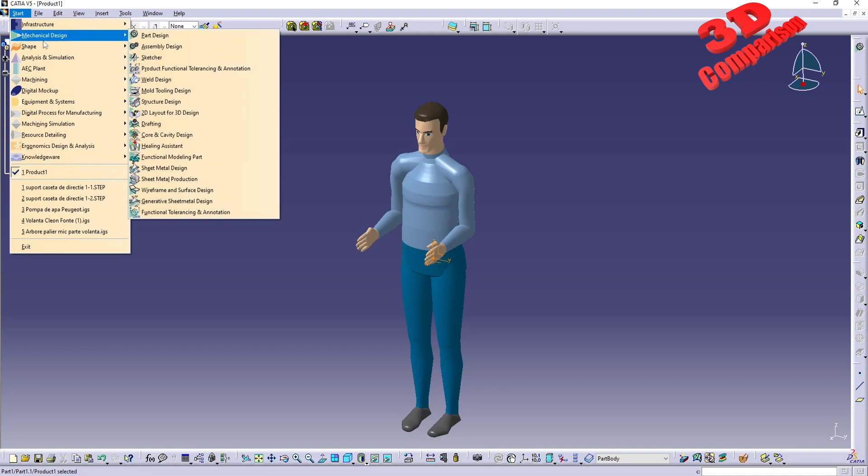So we are going to create initially a spherical model. To do that, I will go insert new part, and double click on part 1. This will take me to part design. If for some reason you are not within part design after you double click, you can just go start, mechanical design, part design, and this should take you there.

Now I will highlight the plane over here, so the X and Y should be fine. I will create a new sketch, and I will create a circle. A radius, I will add this to be 30. And since I want to define a sphere, I will also create an axis.

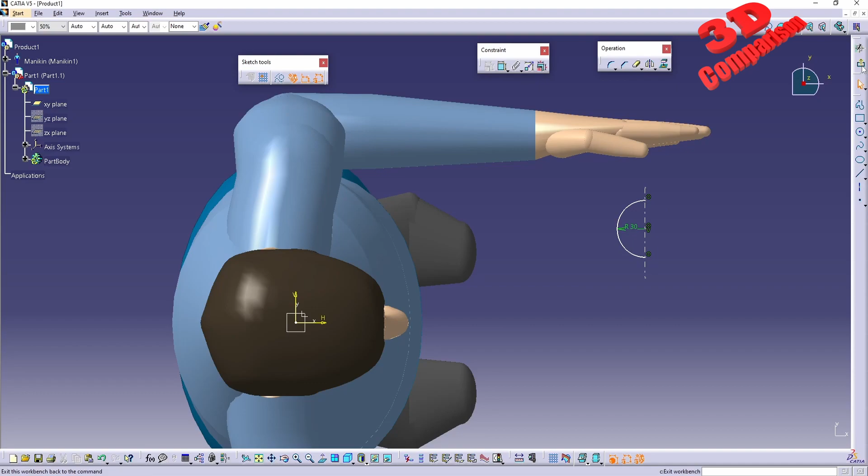I can put that axis to be coincident with the circle center. Afterwards, using the trim tool, I will delete half of that. And with the resulting sketch, I will create the following model over here.

Now I will move this to be a little bit closer to the hand of the manikin, so I will double click on product 1. This should take me into the human workbench.

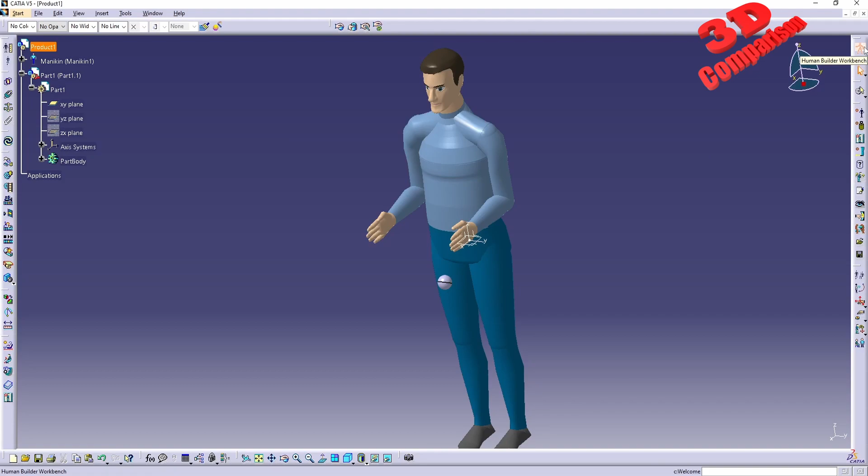I will enable this to snap automatically to selected objects, and I will select the part 1. We're gonna see that the compass will snap to the origin, but that shouldn't be any problem because we can still manipulate the object.

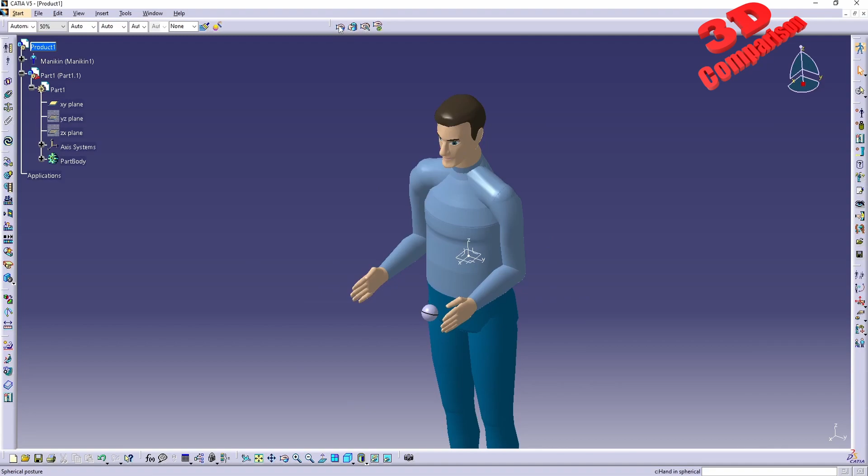Okay, so let's see how we can use the hand spherical posture. Before we're gonna use that, I should also position the mannequin within the reach. We can do that over here. We have a reach position only, and we're gonna have reach position and orientation.

But before I activate that, I will go within inverse kinematic behaviors. For the case study manikin, I want this to have a spine and lumbar support over here. So let's just see the difference really fast.

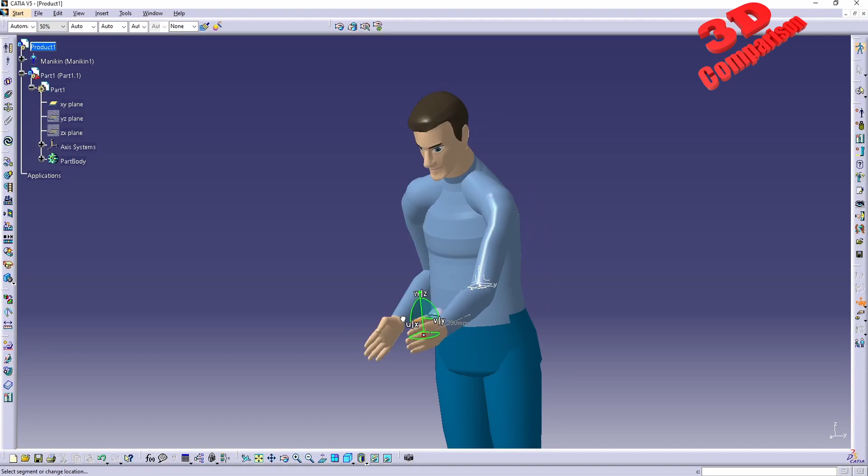So if I will go with inverse kinematic with this hand, I want to grab that. We're gonna see that now the character will move like this. So we see the reach. If I will move all the way to the side, we're gonna see that the torso of the character will not move. So I will undo that.

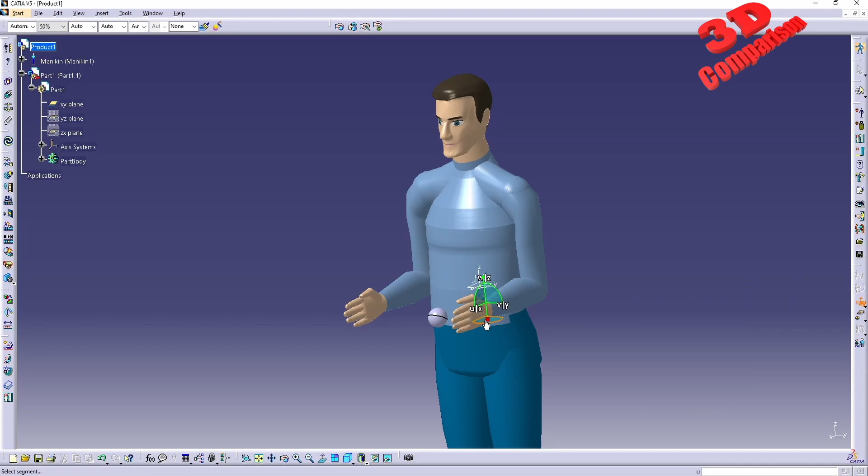I will go to inverse kinematics, and I also had thoracic enabled, because by default, if you don't have that, the character will move the hand like this. As you can see, just the hand from the shoulder is moving up and down according to the desired location, but the torso is not moving.

So I will undo that, and I will enable for the character thoracic and lumbar spine. I will also check balance pelvic motion, and I will also want the character to look at the object that will grab, in this case that sphere. So look at active, and this should be the changes to the inverse kinematic behavior.

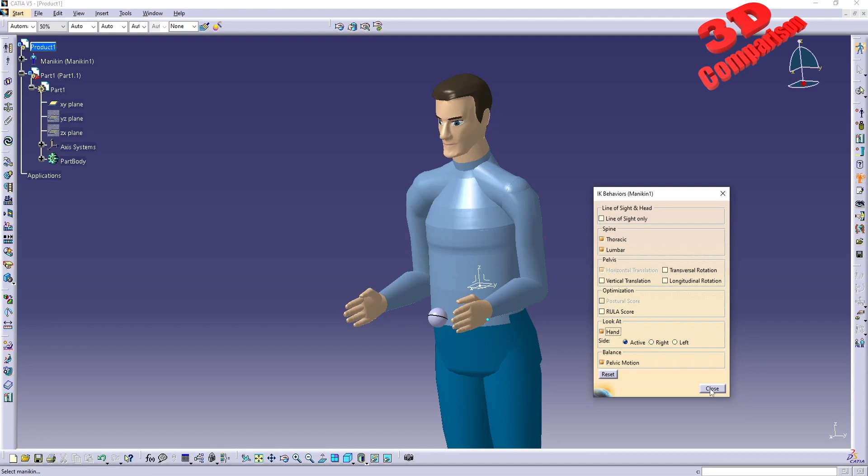And afterwards, let's do that positioning. So I will click over here on reach position only. Now on the surface of the object, I can select the location. So for example, I want over there.

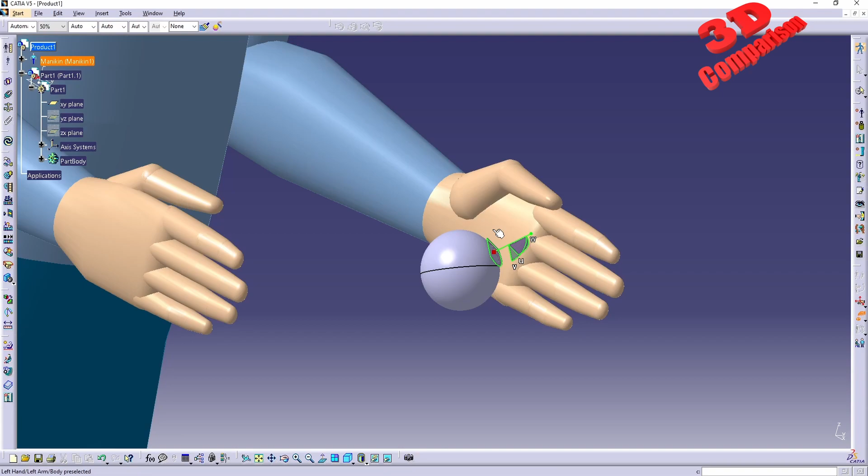And now I will need to select the hand. So I will select the surface from the palm interior, and we're gonna see how that moved into position.

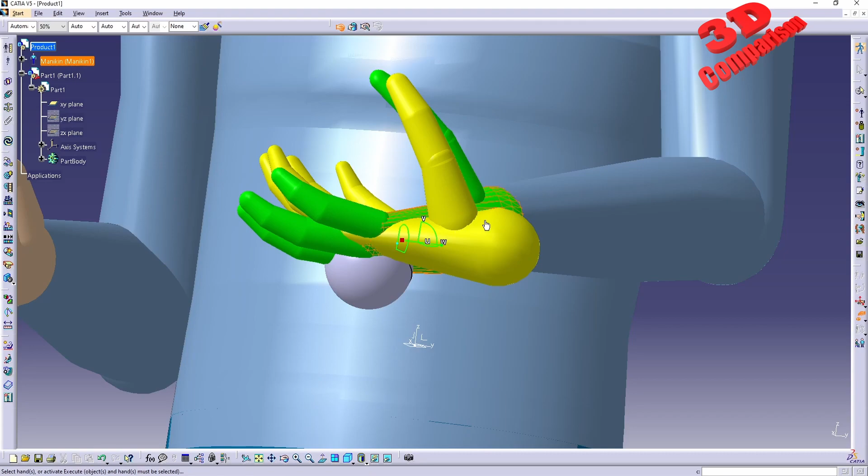And now I will also add this to the hand spherical grip. As we can see over here, the hand will be positioned like this, so it will be with green. Now we're gonna have the twin, which is the yellow one, which will also indicate the out of reach section.

But you can just manipulate this. So for example, maybe I want to position this underneath that sphere. If I want to also close the fingers, I can do that.

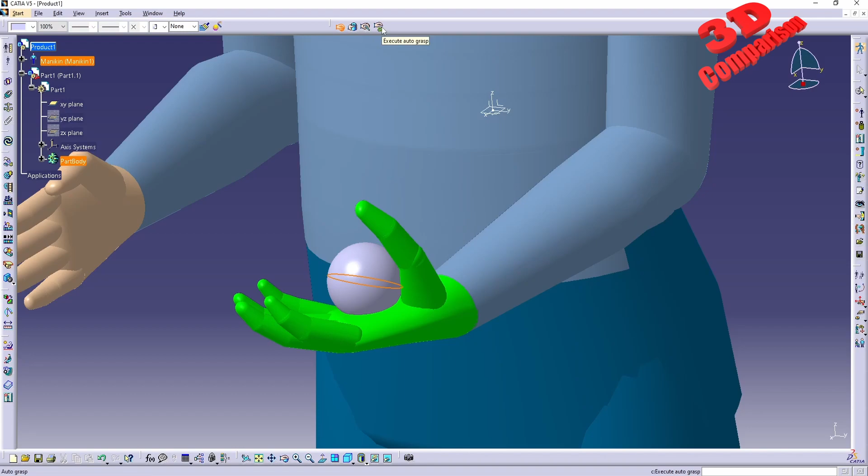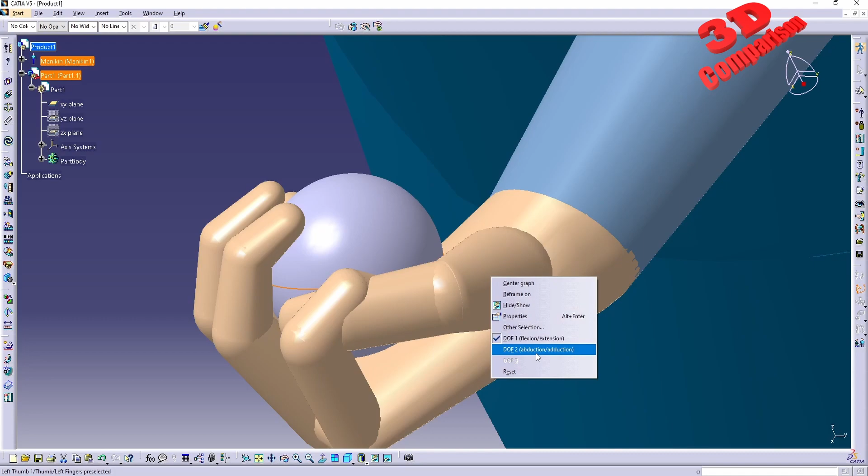I can also go over here and execute auto grasp, and the software will try to find the ideal position. We see that in this case, we have two fingers overlapped. We can just change those. So for forward kinematics for this finger, I will right click, and for the other one I will change the abduction and adduction so they won't overlap. Also for this finger, I see that this rotation is quite snappy, so I will just move it like this.

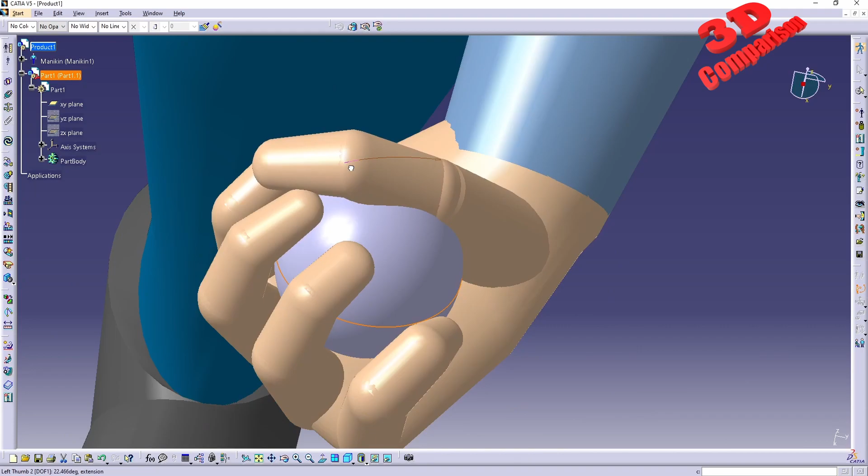Okay, so we're going to see that the mannequin will grasp that, with the execute auto grasp for the spherical shape over there.

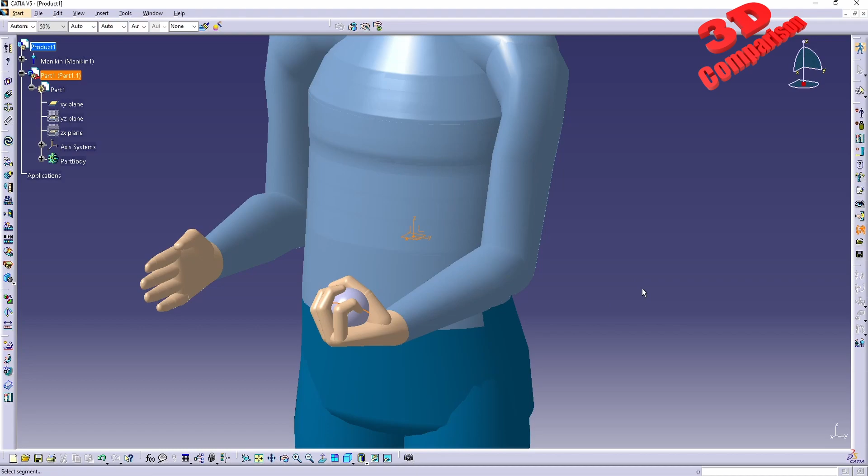Now, if we want to attach this to the mannequin, we can do that using the attach-detach button. So I will select, we see over here we are indicated to select the segment. So it will be that one. And we're going to see that part 1, which is the name of the new part, will be attached to the segment left hand. And I can click OK.

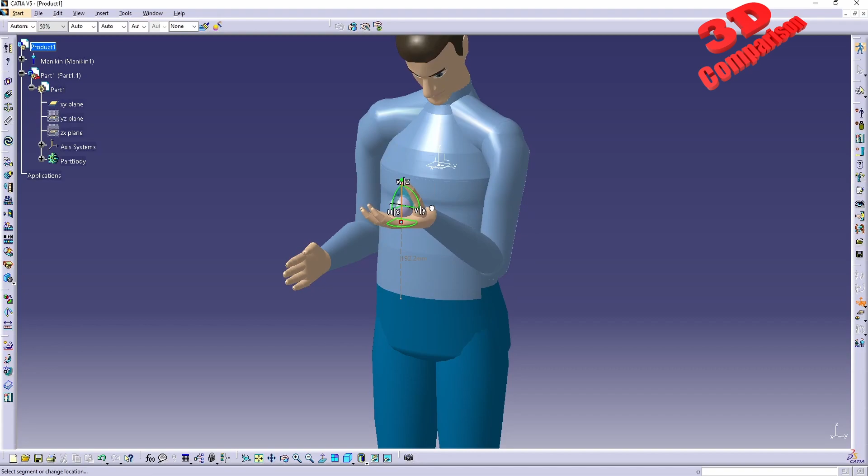And now if I start the inverse kinematic forward, we're going to see how that character will move the hand. We're going to see that in this case, the grasp is no longer there, but we can always compute that grasp. Let's see.

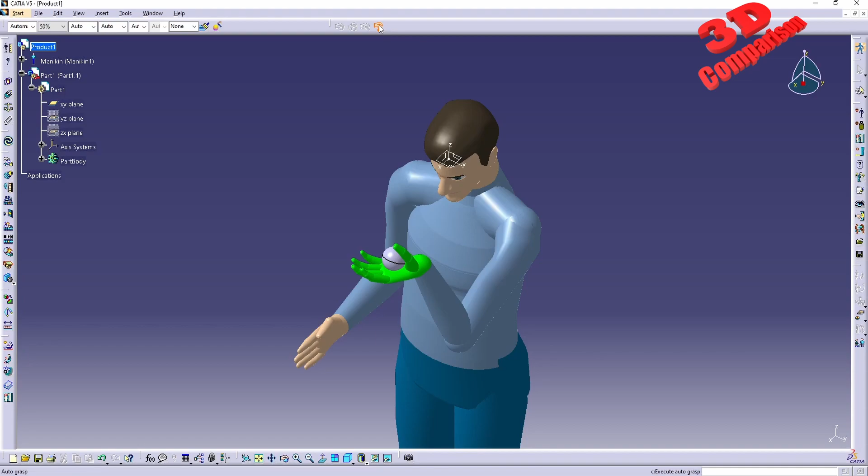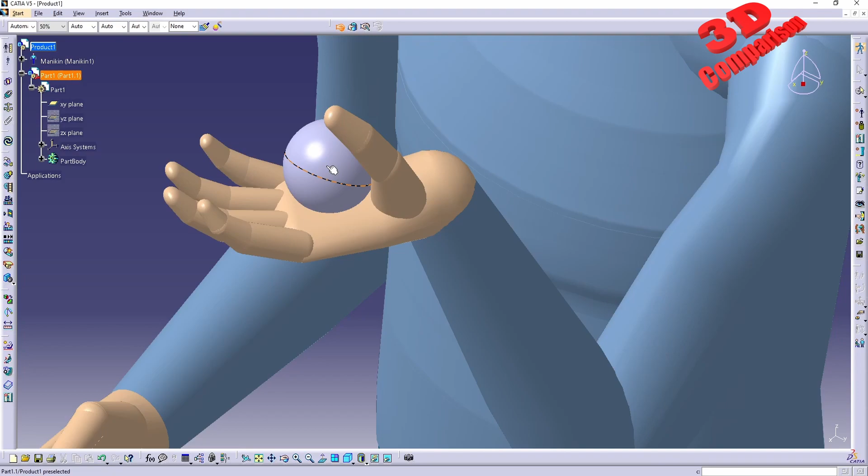Okay, if I disable that and choose again hand spherical posture and select the hand, I see that for some reason it doesn't want to grasp that anymore. So let's retry that. So within the product, spherical pose for that part with this hand.

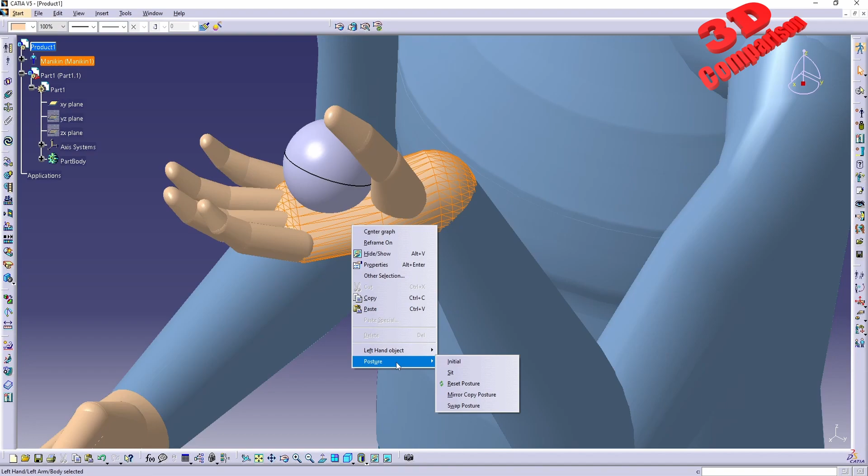Okay, I will just move the hand, or we can also use another technique. If I right click over here, we're going to see the posture, but I will go within the posture editor. And you're going to see we have the hand over here.

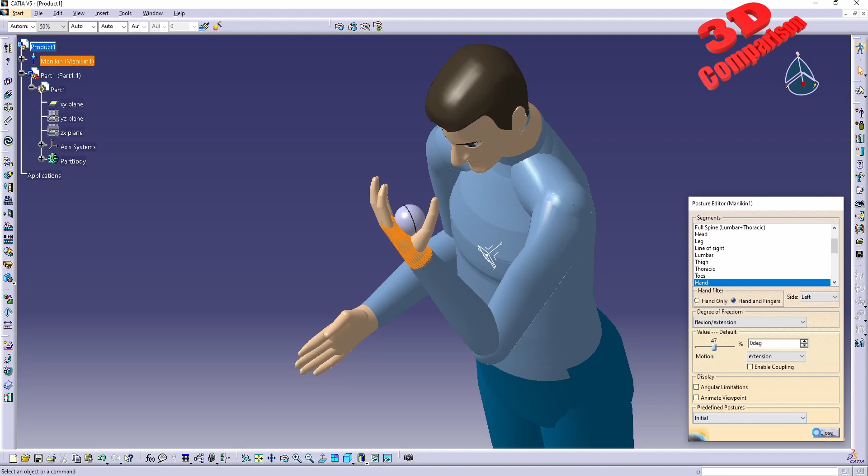So we have the side. I will just reset this. Let's see if the grasping will work now. So it still doesn't want to compute that grasp. Okay, so now again we have that grasp done.

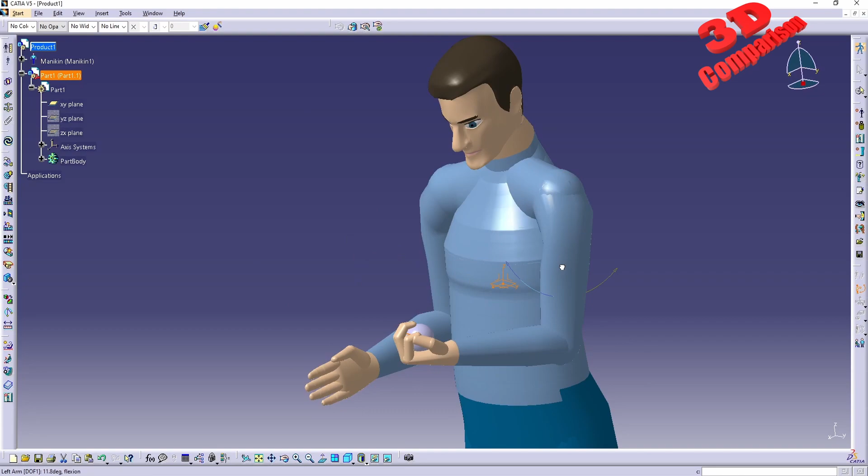Let's see if I use the forward kinematics now. We're going to see that the forward kinematic button will not unlock that grasp. But if I go with inverse kinematic worker frame, or if I go with segment in this case, and let's take a look for the hand, we're going to see that the inverse kinematic models, both the inverse kinematic worker frame mode and the segment frame mode, will close that grasp.

So keep that in mind, that you should go with forward kinematics, as that will also keep the position of the hand.

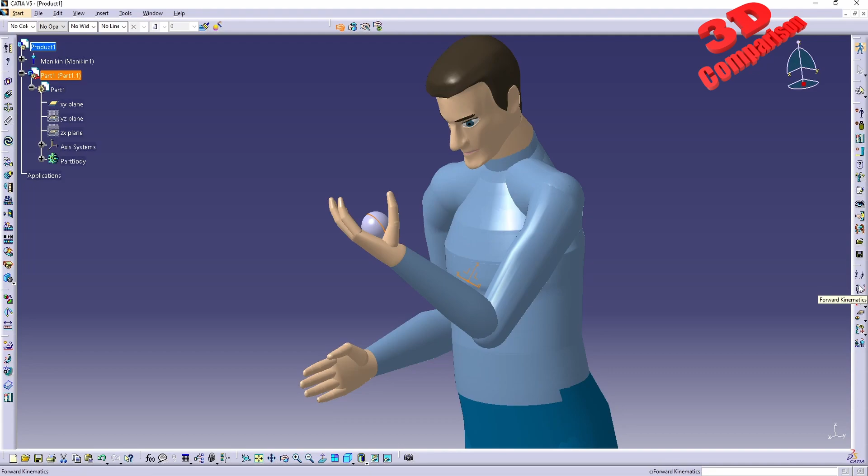Now let's see, for the other grasp, this will be a cylindrical one. I will create a new part. So I'll go over here, create. I want a new part, this should be part 2. I don't want to specify a new origin.

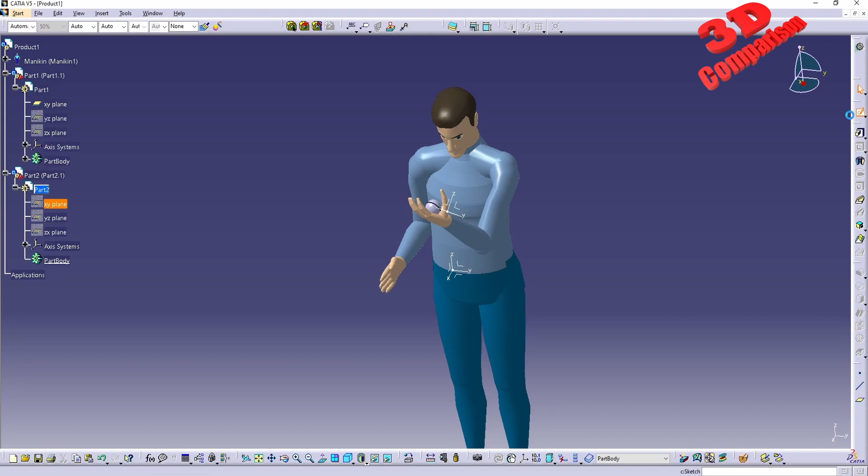And within the X and Y plane, I will double click on part 2 to go to part design. And over here, I will create again a circle. I will add a radius of, for example, 40. And now I will extrude this.

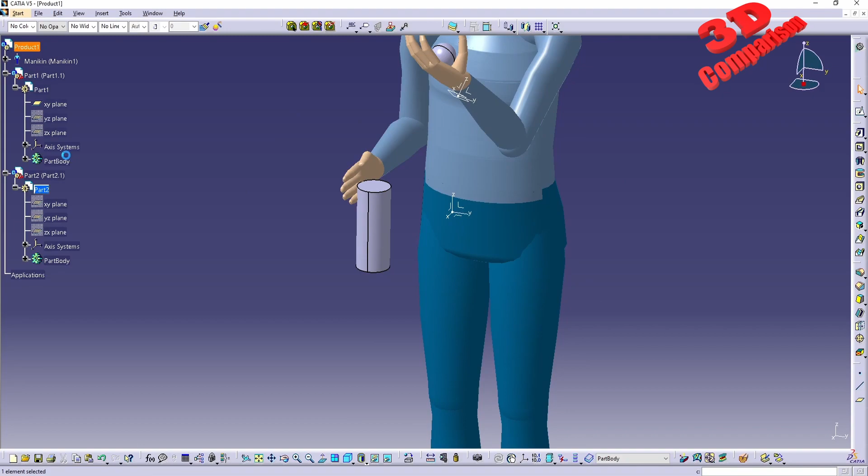For 20 millimeters, 200 millimeters. Okay, so in order to reposition that, this should be within the grasp of the mannequin, but I will just snap that and move it a little bit higher.

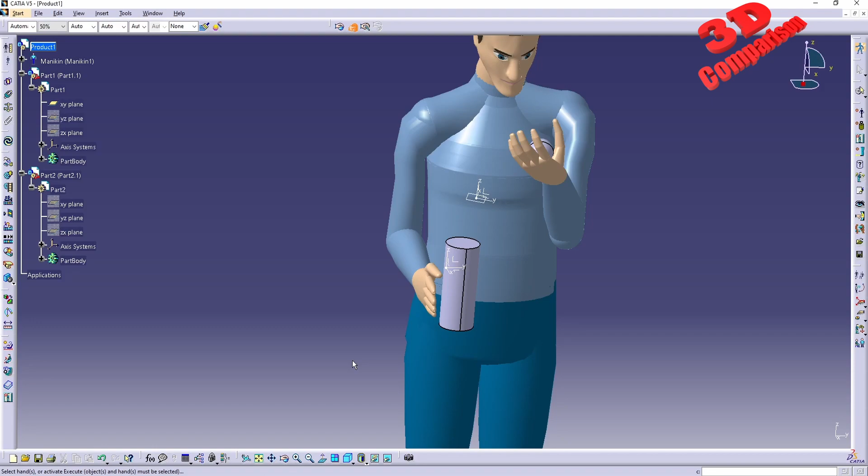Now, let's see how the cylindrical grasp posture will work. It will be the same as the sphere. We're going to select the tool. Afterwards we're going to select, we see over here on the left side of the screen, select hands or activate execute objects and hands must be selected. So I want this hand to go over there. And we're going to see how it went into that cylindrical shape.

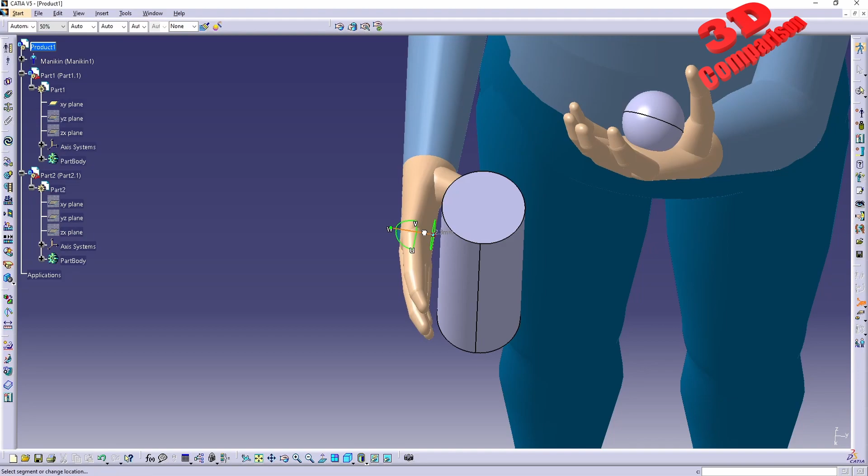Okay. Now we just need to adjust maybe a little bit from the inverse kinematics. I will slightly move the hand, so like that.

I can also always go within the top view because that will give me a better view. So top view should be that one. And over here I have the possibility to better fit this within the mannequin hand.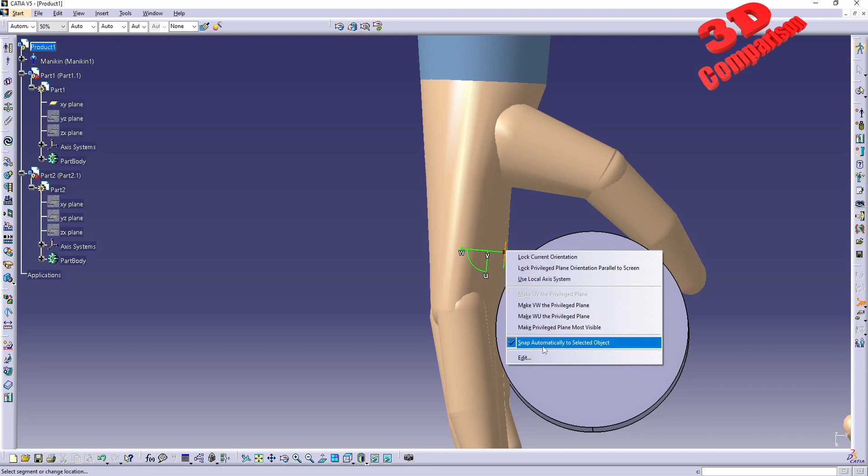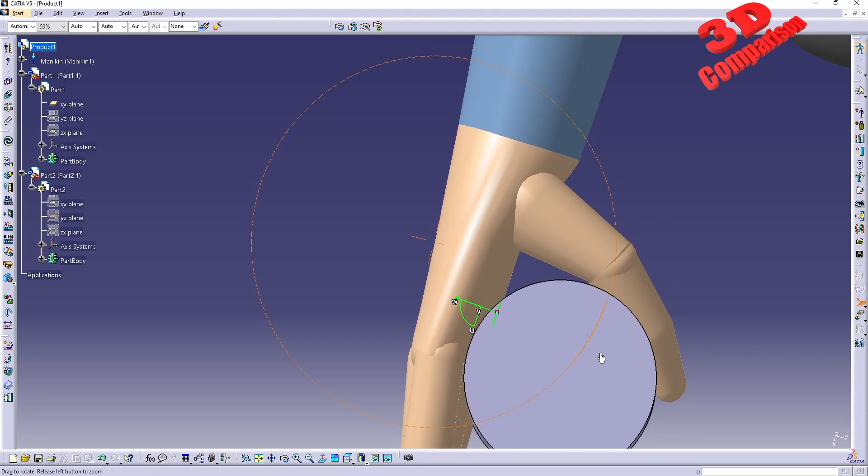We're gonna see that currently this snaps from 0 to 10. In order to change that, we can edit this, and we see over here the increments. If I add 1 for each, now if I move the compass, this will always go according to those increments, so it will only add 1 millimeter. This will be a lot better to position the mannequin hand.

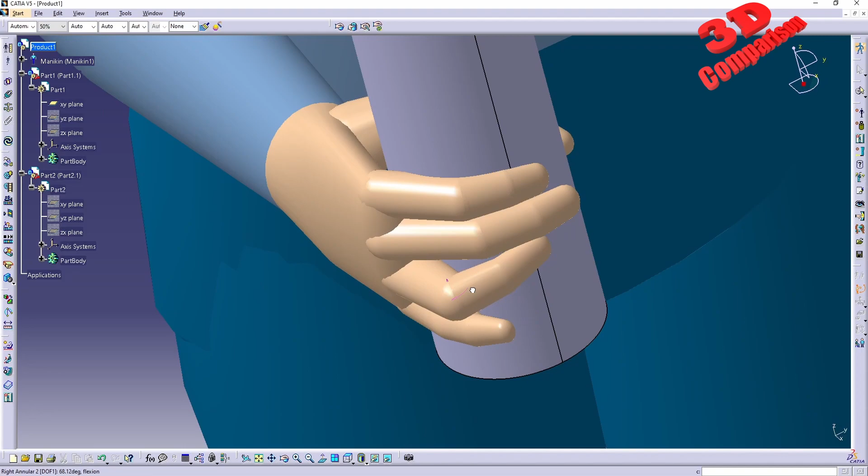We can later adjust the grasp of this. Using the inverse and forward kinematics over here, I'm gonna position the fingers of the mannequin to that cylinder. Keep in mind you'll have to do that. If you want to change, you can change the second degree of freedom. For example, for this one we only have 1 degree of freedom, but for this one we also have the radial deviation, which will allow me to go up and down with the finger.

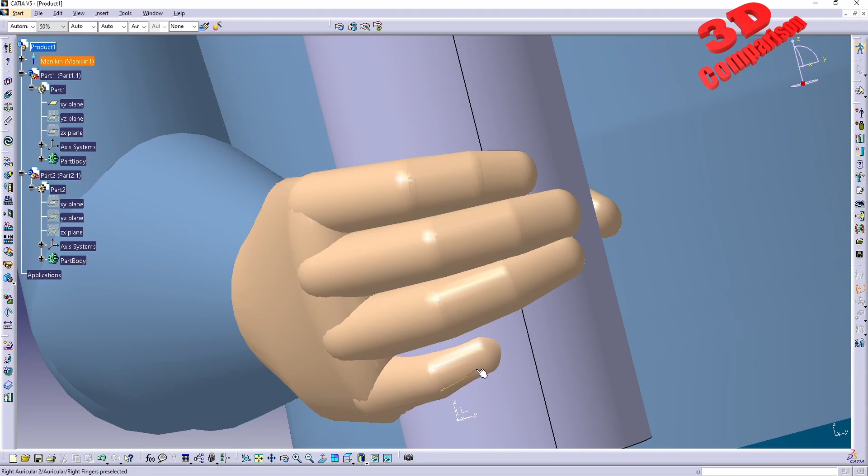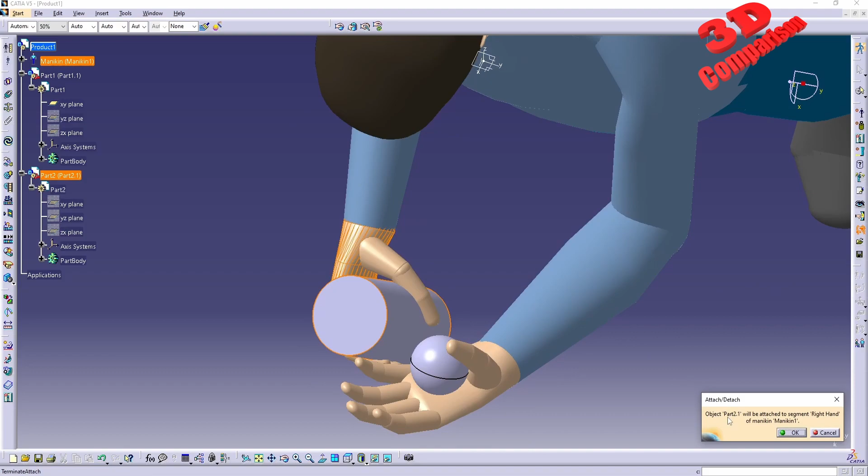Afterwards, I just want this to go a little bit back, so somewhere like this. And again, if you want to grab that, we can just select the detach. Afterwards, I'll select the object and attach this again to the hand. We're going to see that part 2 will be attached to the right hand. We can click OK, and we are going to have that.

Now if you want to detach one of the components, you can use the same function over here. So attach, detach - you select the object, and over here we can either detach it or attach it to another object. With a simple detach, this will be successfully detached, meaning if I move the hand, that won't move anymore.

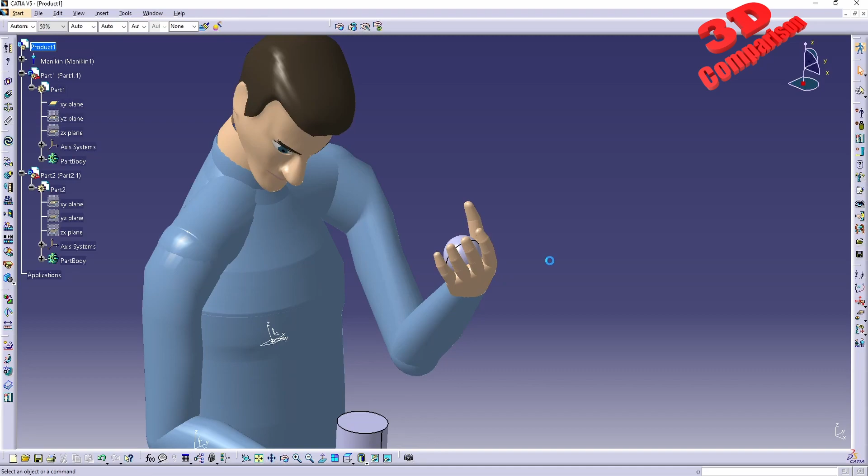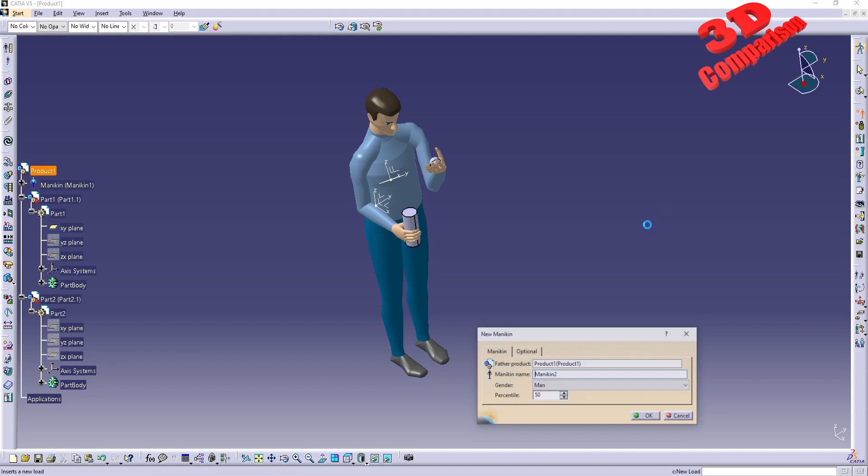But let's see also how we can attach it to a different one. So I will press undo multiple times until this is still connected, like this. And I will add a new mannequin over here. So go to product 1, insert new mannequin. Let's create a woman now. Go OK, and we're gonna have the second mannequin over here.

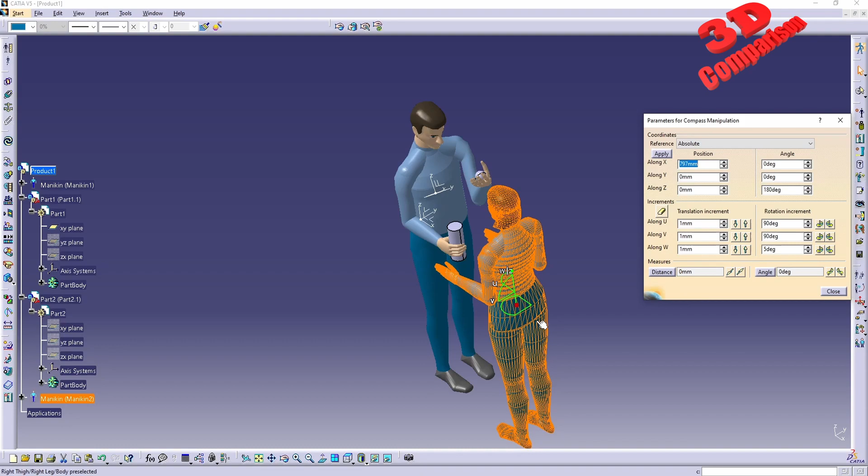I want to move this in front of that. As you can see over here, the increment for rotation is currently set to 5 because I have that over here on the W axis. You can right click on the compass and change that if you want smoother and finer rotations. I see that this changed, so I'm just gonna go over here 0 and apply.

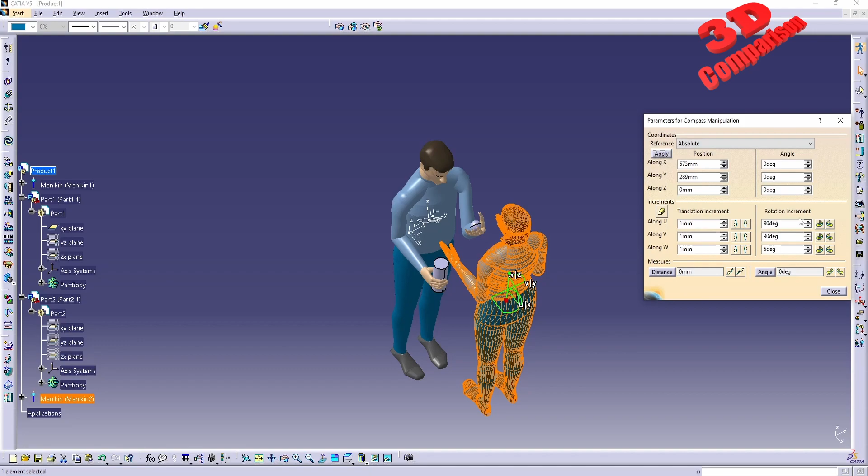You can also put directly the absolute values, either for the location or for the rotation, just like I did over here, in order to position your mannequins.

Now let's say that we want that sphere to be grabbed by the second mannequin over here. We can go with the reach position over here, or we can go with position orientation, but usually this will rotate the arm a little bit odd. So let's take a look at that.

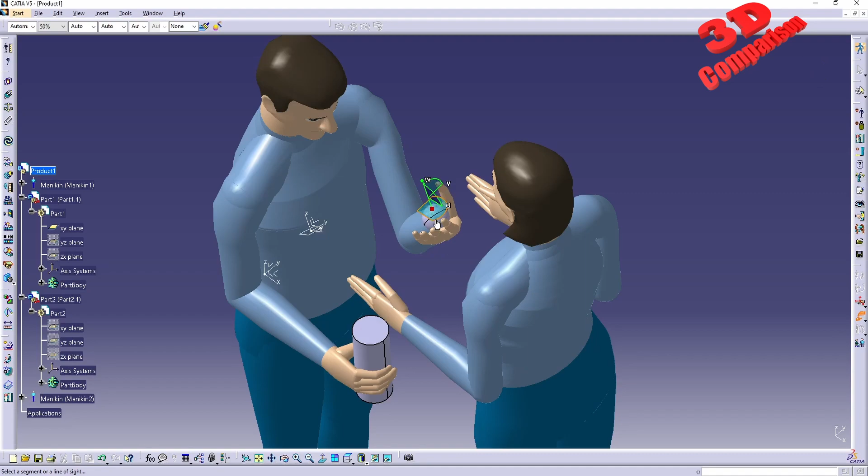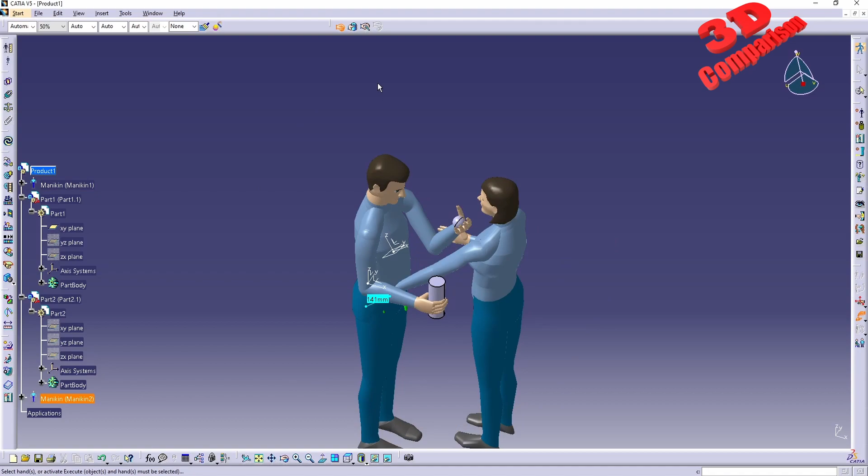I want to position the hand of the second mannequin over here at the top, and I want the palm at the top. We're gonna see how that will look. Over here we can now compute, in this case, a spherical posture. We can see that didn't go in the desired location.

So I will just move this manually over here, and we're gonna have those fingers. I will just slightly position - we're gonna have a lot of collisions over here.

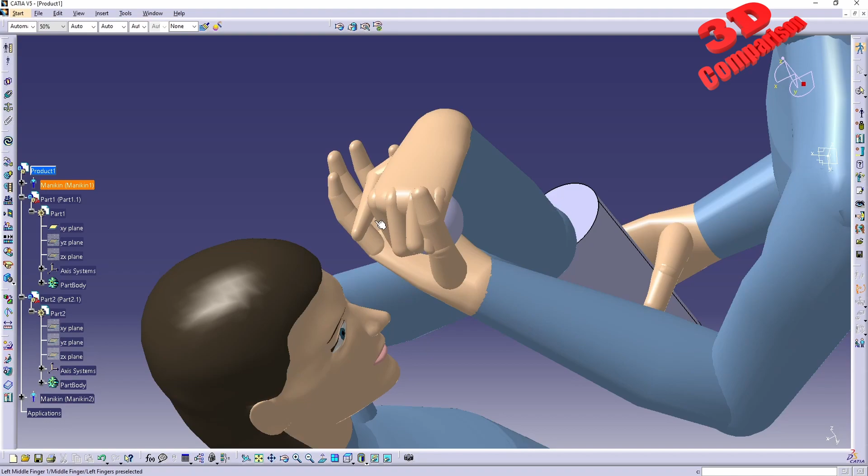This is why I also appreciate the fact that Dassault decided to implement this, because other CAD solutions don't want to deal with mannequins and posture like this, because it's not the simplest thing to do inverse kinematic simulations.

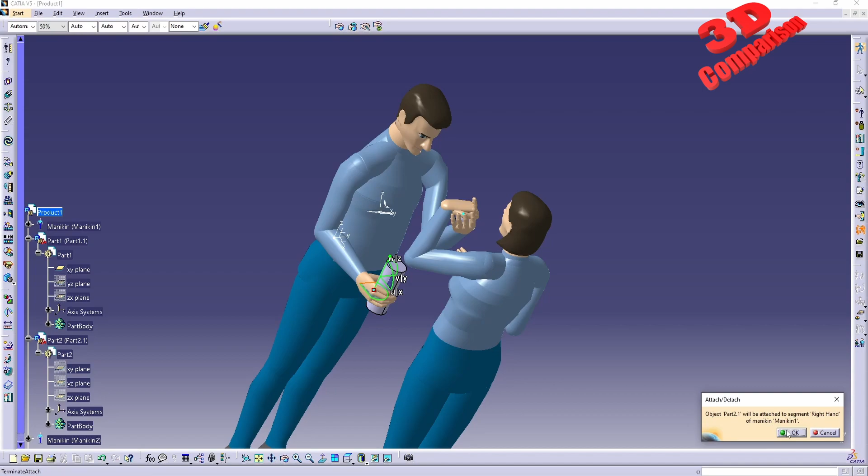Let's just move this hand. Okay, I see that that is no longer attached. So let me just attach that. I see that I also moved the hand a little bit too much. Attach to the hand, okay. And afterwards I will just move that.

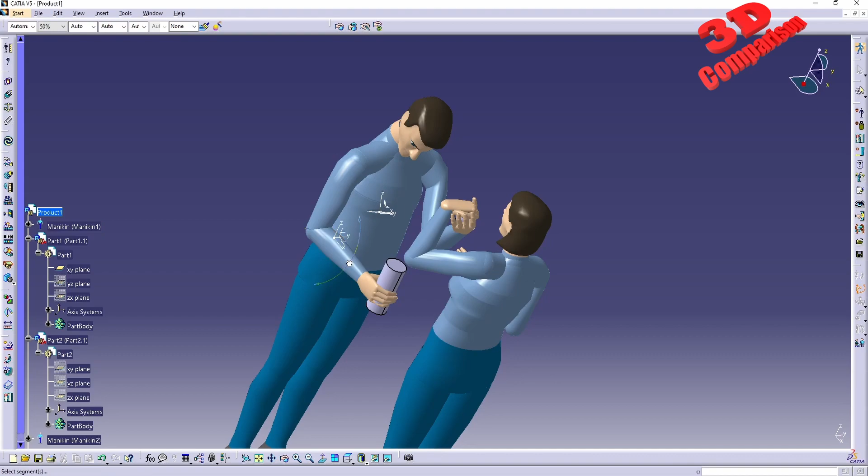Okay, I see that for some reason that didn't attach. Let's do it again. I want this to be attached to the hand. Click OK, and afterward let's just go with forward kinematics. Yeah, that should work, and I will move that cylinder over there.

Now I want to attach the sphere to the other mannequin. I'll go to define attach/detach. I want this one, and we see over here attached to other. I will select the female hand, so mannequin 2.

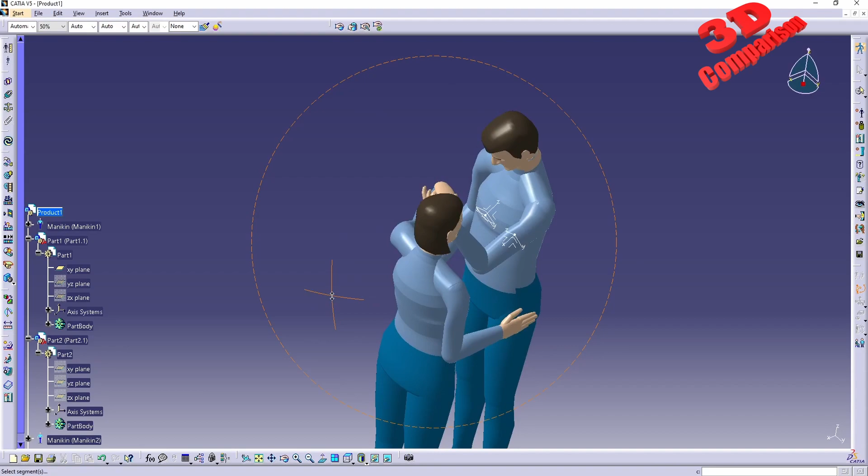And now if I move initially the hand of this one, that should be okay. So we had that moved. Keep in mind that for each section you're gonna have abduction and adduction, and you can slightly adjust that. Now I have the possibility to manipulate the other manikin.

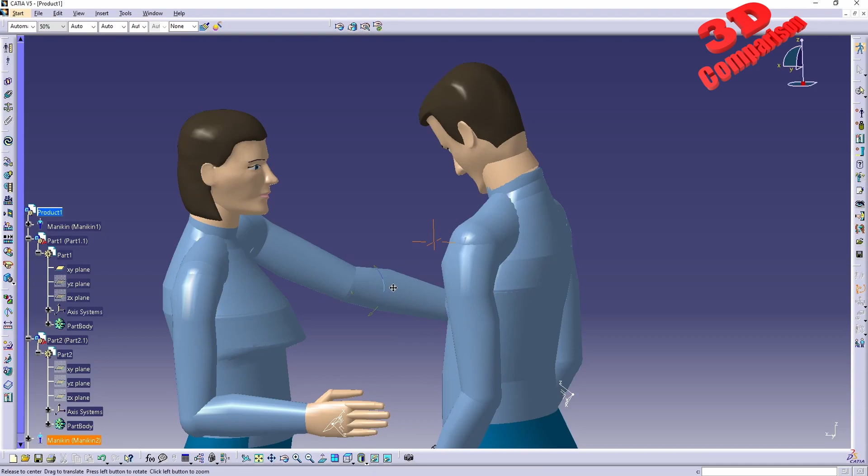Keep in mind that you can also have all of these animated. So we have the functionality to do manikin animations. We see also that hand. I will just move that like that.

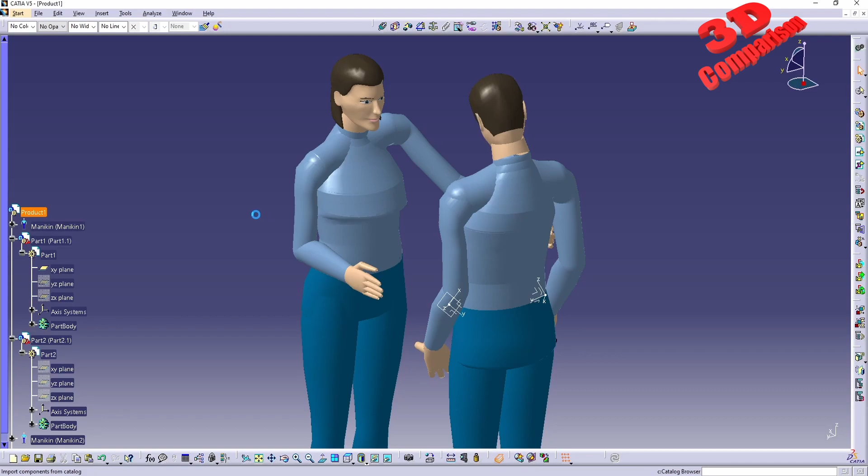For the last case study, which will be hand pinch posture, I will go within assembly design because I want to access the catalog from CATIA, which will be over here. So, catalog browser. And this should be the catalog browser.

I will add a screw. I'll double click on the screw. Let's see. This will be the type, and I want a larger one, so maybe M10 with 60. I need to select it at the top. So metric 10, let's go a little bit lower into the list, with 60 for the length.

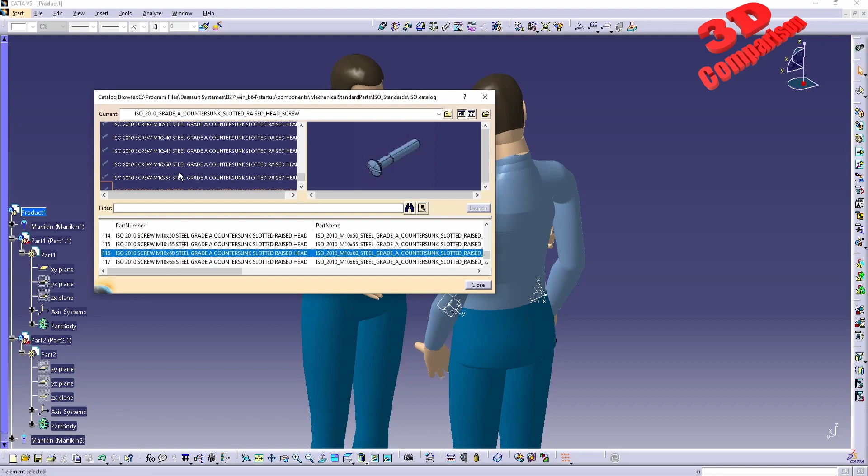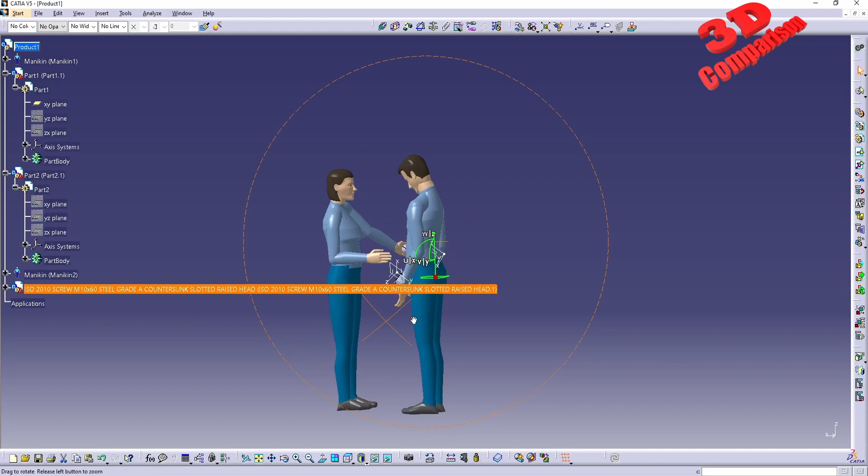This will be that. I'll double click it, and we're gonna have that added within our scene. I can just click OK, or I could do some constraints using the constraint tool, but I will just click OK and move it manually. We have it within the origin.

I will move it towards the hand of the second manikin. Okay, I will also have that rotated. I see that the increment doesn't want to rotate. Sorry, so I will just add some 3 degrees.

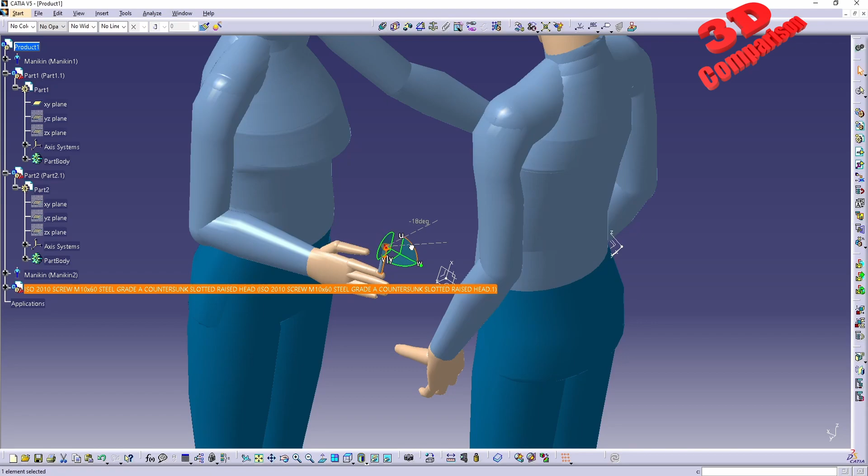And that should rotate now using that increment. Okay, so we have that. I still need to position it a little bit closer to the second manikin so that it will be able to grab it. Okay, so we have it over here.

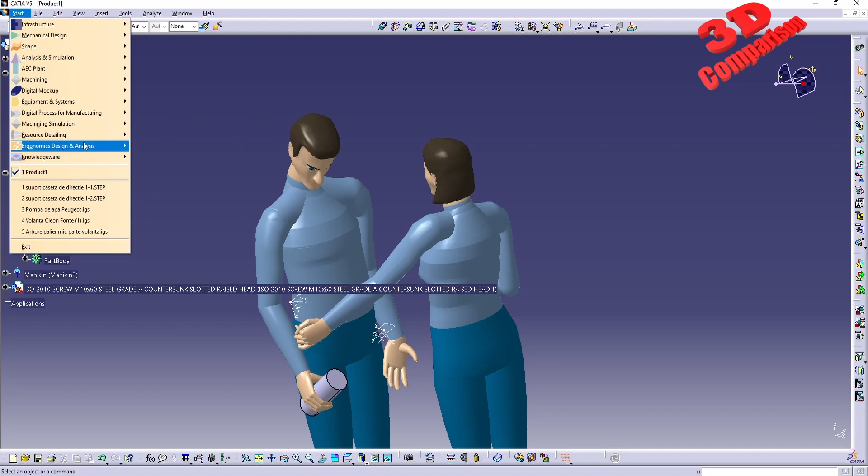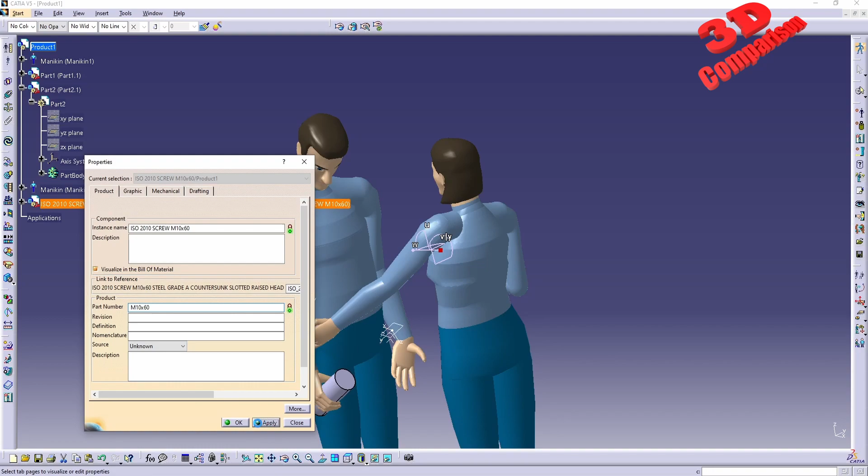Now let's check the pinch grabbing pose. I'll go to ergonomics, human builder. I will move a little bit the tree, because this ISO screw from the catalog has quite a long name and it's overlapping the viewport, so I'll delete some of that. We see that within CATIA it will also be within the part number at the bottom, so have that changed too.

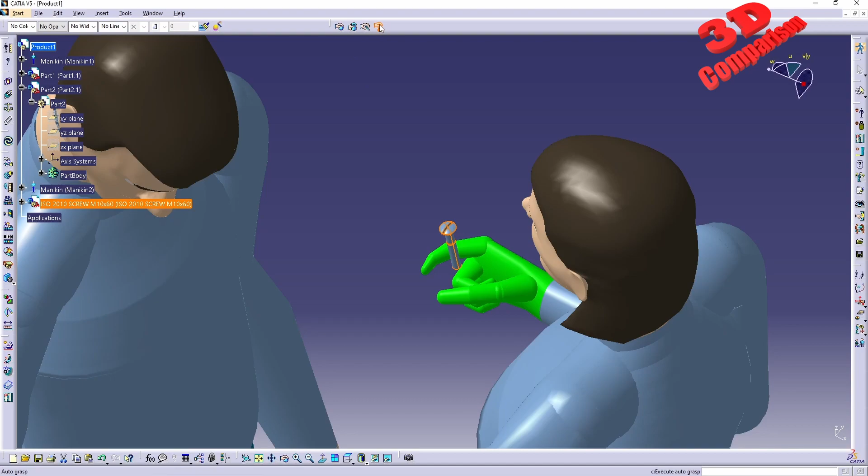And we're gonna do the pinch pose. I'm gonna select the hand, so this went into a pinch pose. And we can execute an auto grasp for that one. Let's see. Okay, so we have that.

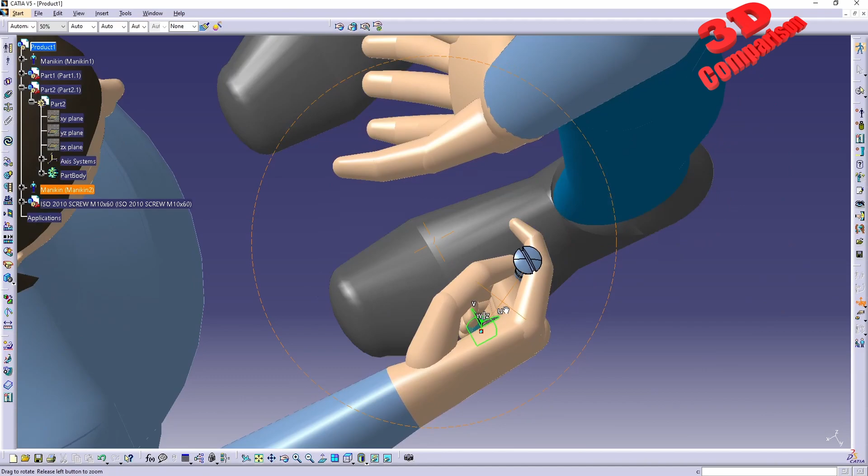All we have to do now is position the hand a little bit better, using the inverse kinematics, something like this. Now it depends on how exactly you want to pinch that. We can do it between the large finger and the index finger. Again, we can slightly adjust those. Let's say the pinching is done using those two fingers, that one and this one.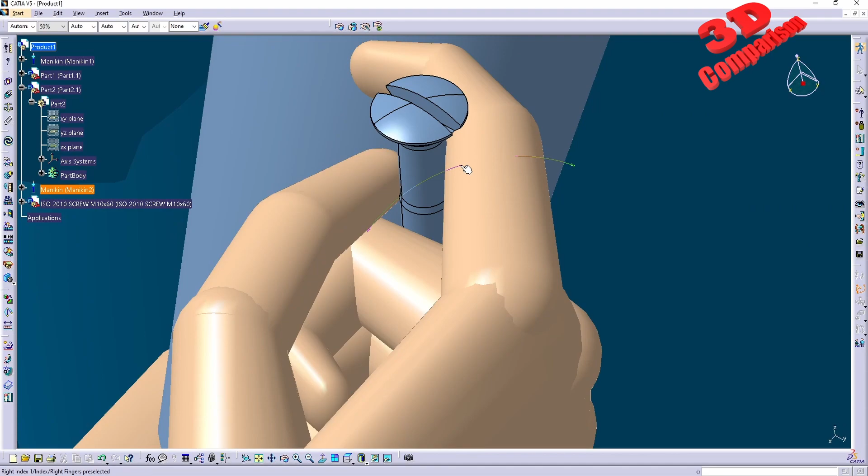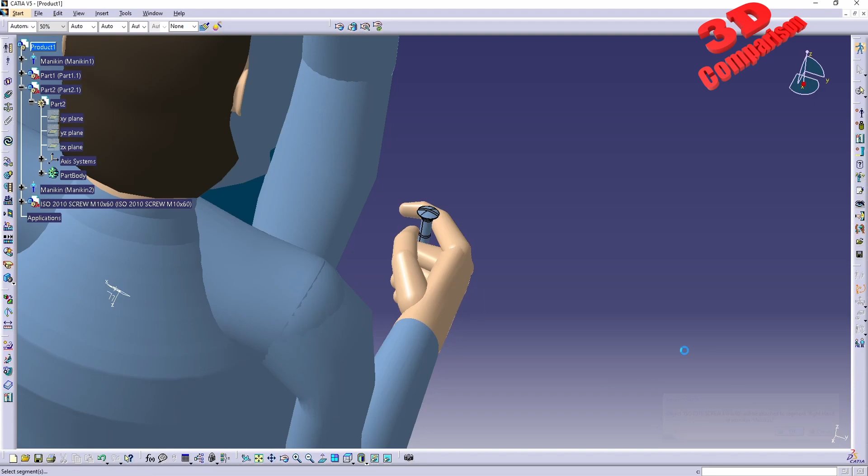We can now just attach that, for example, to the finger. We can do an attachment like that, an object attachment. I will save the hand because I saw that in this case the finger wasn't a correct option.

So we can now start and move this around. Okay, so I see that this video is already 21 minutes, so we're gonna stop over here. Mainly we discussed here the manikin hand grasping for various shapes.

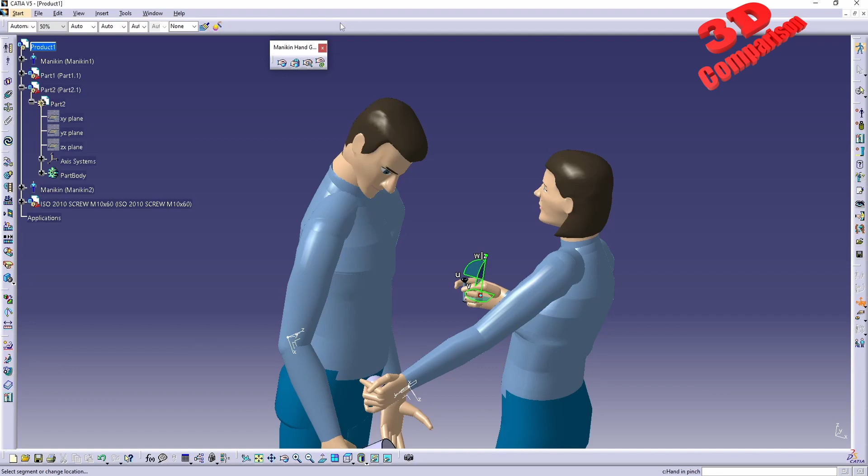So spherical, cylindrical, also pinching, where we mostly use two fingers. So I hope that you find this video useful.